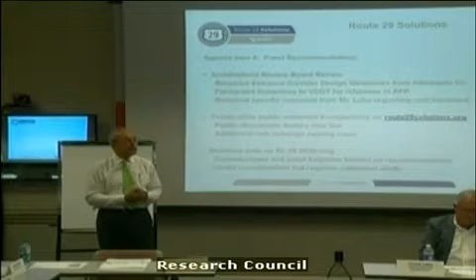Just an update on some recommendations that have come from you that we've firmed up a bit. The Architectural Review Board review—as you'll recall, we talked about trying to build as much as we could into the RFP package, as opposed to just getting designs and then asking people what they think of them. Mark did send us the entrance corridor design guidelines, and those guidelines are being reviewed now for appropriate inclusion in the RFP that will go out. We did get, and thank you Chuck, a specific comment from Chuck about treatments to the retaining walls. Today is the day we hoped to get any additional specific comments on architectural or landscape treatments, so we can pass them along to VDOT and have them considered in the request for proposals. We could stop right here and talk about architectural treatments for a bit, if you'd like to do that.

Morgan: I flagged in our last meeting that this was an issue important to us, and we were going to have some input, and I appreciate the extension you all gave us. It's important enough to us that we decided to hire a landscape architect to look at some of these issues. I brought a couple of drawings today, and if y'all will humor me, I can walk through them for about 5 minutes or so.

Can I help you pass these out? Those should cover those folks on that side of the table. I've got them, Morgan. Here's 3 for these folks here. Some free work done for you, John. I apologize to the members of the public, we didn't bring enough.

While those are going around, I'll just start by saying our goal was really to identify some of the items we think should be focused on in the RFP as far as architectural treatments go. We spent a good amount of time at our last meeting, and I think we'll be spending a fair amount of time going forward thinking about the traffic effectiveness of this particular project. But as others have pointed out, I think it's important to realize and remember that this is going to be a very important visual gateway for our community, a gateway to an important commercial section of the Route 29 corridor. So it's something I think we want to be proud of when it's all said and done. Let's make sure it's attractive. I think it should convey a positive sense of our community.

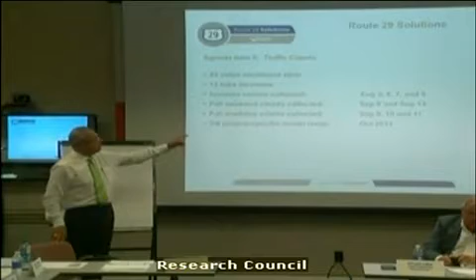There were a total of 33 video sites where video was used to capture traffic, and 12 tube locations. Back in August, before school started, on the 5th, 6th, 7th, and then the 9th, summer counts were collected. Last Saturday's weekend counts were collected. There'll be additional counts collected this Saturday, and today weekday counts are wrapping up at these locations, having started on the 9th. By the end of September, early October, a project-specific traffic model will be available and we'll be able to see the output from that model.

We had a conversation with Karen on some issues today, and that's the model we were talking about, Karen, that would actually let us see more detail as to how each project can be expected to perform in terms of traffic. Yes, sir, fall weekend counts are both UVA game days?

That would be accurate. The 6th and 13th are both UVA home football games. Just wanted to point that out. That's true, a little bit of a spike there, I would assume. Let's go back and talk with Teresa about that and see. Maybe one of the two days would be fair, but I don't think it would be a fair representation to have two of eight days represent the whole year. Get a maximum threshold. Yeah, that's easy enough. That's a good point, thank you.

Thank you. Thank you. Peggy Malone is doing that, right? Or Baker? Yeah, okay. Joel, will you take that back to Baker? Okay, thank you Pete, thank you.

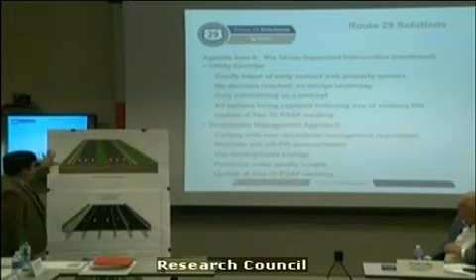So we got the typical sections we're going to look at today. I think last time we looked at the plan sections, the plan views, the top down, and today we're going to look at the lane configurations. It sounds like some of you have already looked at this on the website, so we'll go over these fairly quickly.

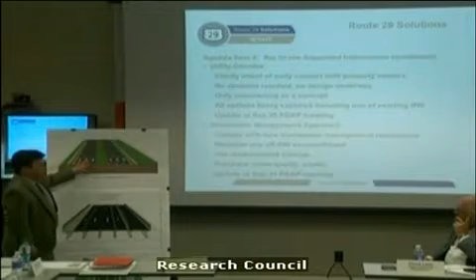This is 29 at Berkmar. 29 from South Fork Rivanna River up to Hollymead. It'll be 3 lanes north, 3 lanes south. Here we're showing 5-foot sidewalks on both sides with a 4-foot utility strip.

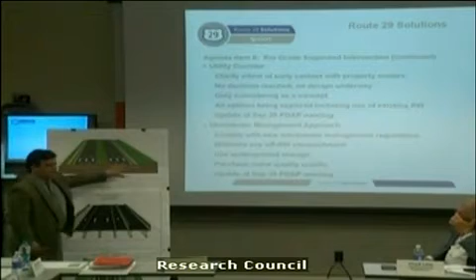As Philip mentioned earlier, we're going to relook at the sidewalk section because the county plan shows a shared use path on the east side of 29. So we're going to see if that fits within the footprint and the budget of this project and try to accommodate that. But for now, the plan is the sidewalks there.

You also notice there's curb and gutter. There's a raised median shown here, so we're converting it to an urban section.

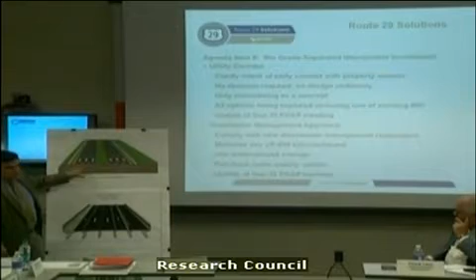Are there any questions about...excuse me, what is the width of the median? The width of the median? That'll be variable through there.

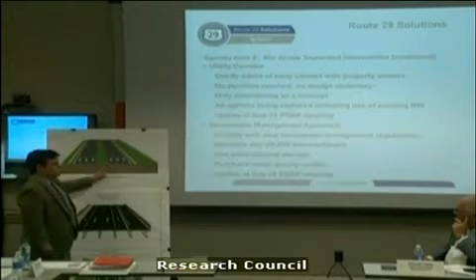Medians are generally 16-foot width minimum on an urban corridor. What that allows is a 4-foot strip when you have a left turn lane that comes in, a single left turn lane. But if you have a dual left turn lane, sometimes you have to get a wider median.

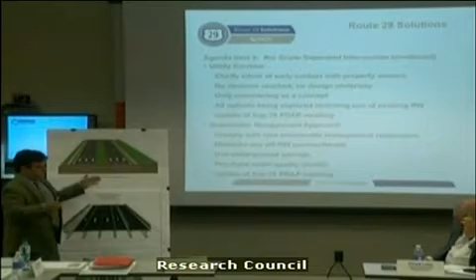In the areas that 29 already has a wider median, you'd probably see that width stay there. And where it's narrower, or where the grades are coming similar, you might see some changes there.

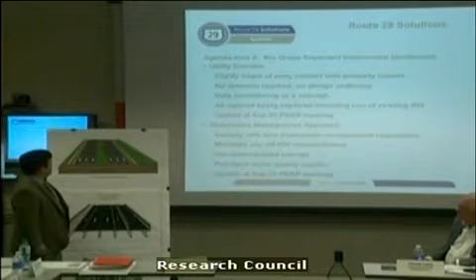Is there enough space for landscaping in that median? Yeah, we'd have to establish what the clear zone is and look at the landscape requirements, but like the 29 south section where there's street trees in there and everything, that's the kind of thing we'd be able to look at again, especially in the wider areas.

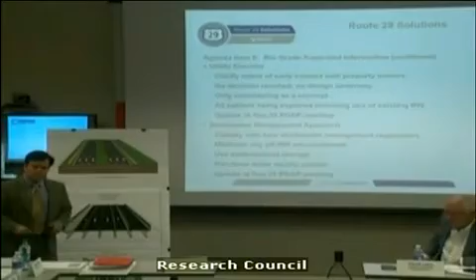Any other questions on 29? If you're talking about planting trees, the thing that allowed us to plant trees on the existing 29 was that all the utilities were favoring the east side of the median, over there. So in order to make it compatible with the utilities that were there and get the trees in place, the trees are not on the center line of the median. They're actually 2 feet offset. That gave us clearance for all the utilities.

So you may want to keep that in mind. RWSA will not allow planting trees on top of the water line. You say utility lines are on the far right side? I'd have to remember where the utility lines are. Under the sidewalk? No, the utilities were in the median, right there where you have your hand.

We checked with all the utilities how much clearance they needed and did a composite drawing of each one, then looked at what space was left for trees. We discovered that by not planting the trees on the center line, but just moving them 2 feet west of the center line, we were in compliance with all the utility requirements.

I'm not exactly sure what utilities are in the existing median on 29. I know that from Hollymead to the north, they recently moved the water line out from under the median and abandoned the old line. From the south, I still think in this area it does, there's gas and fiber optic. I think the fiber optic is over here now, up the side. Fiber's above ground through here on the top. Fiber optics is on the side.

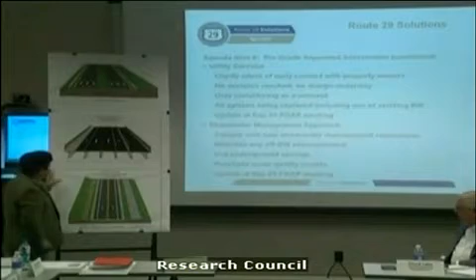Now we're going to move to Berkmar. This is the Berkmar Bridge section, and this is the Berkmar Road section, and they line up with what the features are. You have your two travel lanes, bike lanes on both sides, a sidewalk on this side, and a shared use path on the other side of the road. Same with the typical section.

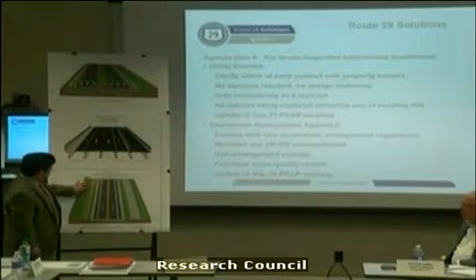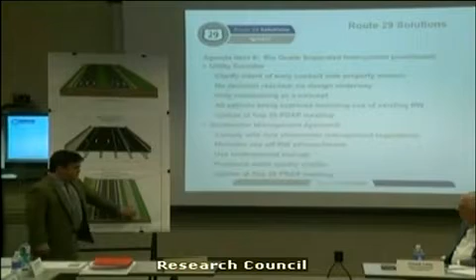This is looking north. You have your two travel lanes. These aren't marked with bicycle markers, but these are the bike lanes. You have curb and gutter again on both sides, your shared use path, and your sidewalk on the left. This would be for the entire stretch up.

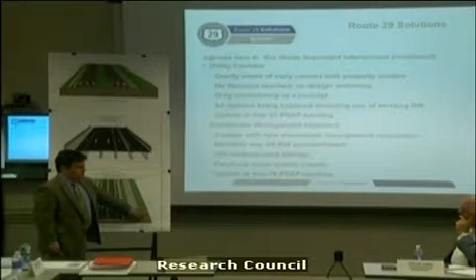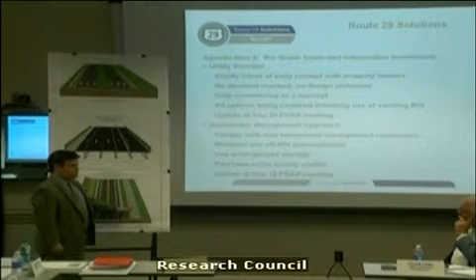Explain for those that don't know, what is a shared use path for? A shared use path is for bicycles and pedestrians. It's designed for two-way bicycle traffic. They have clear zones like a travel lane does for bicycles to make maneuvers. Typically a shared use path is used by a lower level bicyclist, someone not as experienced who would be out on the road bike lanes. It's good for kids on bicycles, but they're designed for 20-mile-an-hour bicycle traffic.

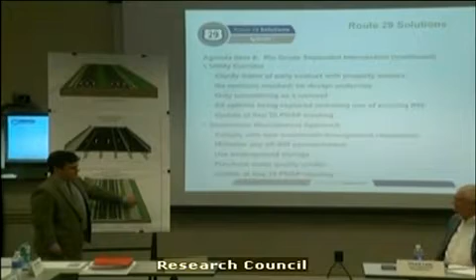Because you have bicycles in both directions and a sidewalk on them. Yes, you do. I think your experienced bicyclists will probably use these. Your kids and their parents could walk together and the kids could bicycle on here, or less experienced riders or teenagers that aren't ready to be on the road with the bikes.

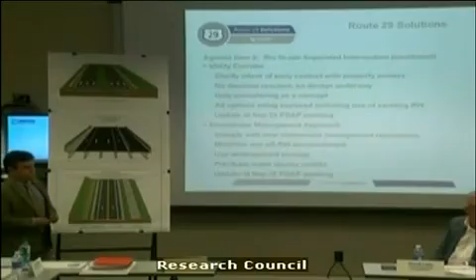It's been mentioned that although Berkmar extension is being built to a 2-lane width because the traffic forecasts don't see us needing 4 lanes for decades into the future, the right-of-way is being acquired so that if ultimately necessary, it could potentially be expanded to 4 lanes. How would that expansion occur?

Basically on the main line on the bottom picture, it would be a mirror image over here of this roadway. You'd have a divided roadway, 2 lanes in each direction. Depending on the space you have, you'd keep your bike lane on the outside here with 2-way traffic. So if this was your northbound lanes, 2-way traffic this way, bike lane going this way, this bike lane wouldn't be necessary. You'd basically start over here and have another curb and gutter section, 2 more lanes of traffic, another bike lane, and your sidewalk.

Is property being purchased there to allow for that? Yes. But it won't be graded to prepare for it? No, we won't grade that section. Grading now is kind of like building the second bridge - there's really no reason to grade it now. When you go down the road and build the other section, grading it now isn't a significant cost savings.

I was curious if a 4-lane Berkmar would eviscerate the shared use path, but it sounds like no. No, there'd be no reason to get rid of the shared use path. The intention is that it would be on this side over here.

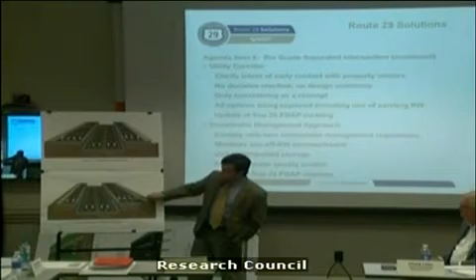Looking north, you're standing south of the intersection looking north. Between here and here is where the bridge would be, where Rio Road would come over. On the local approach, you have 2 through lanes with the rightmost shared through lane, and 2 left turn lanes. The left turn lanes will go up to the bridge and go west on Rio. The through lanes drop down, and this distance goes from 0 up to a clearance of about 16.5 or 18.5 feet.

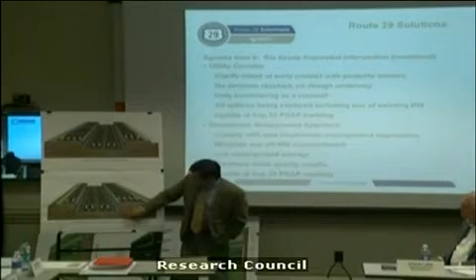We have sidewalks on both sides. One comment we had last time was whether there would be shoulders as you go under the grade separations. We're showing an 8-foot shoulder here, and a 2-foot shoulder on the inside. The 2-foot shoulder doesn't give you anywhere to pull over, but it does give clearance where you have to have a wall going down to separate that traffic again. We don't have enough width for a raised median, so it has to be a Jersey barrier, which is what we're showing here now.

You also have barriers on either side of this wall to protect it, and we have them up here as well. Obviously those treatments are generic looks at what they could be - they can be various kinds of things. It's the same typical section up here.

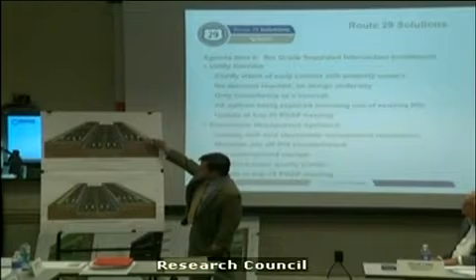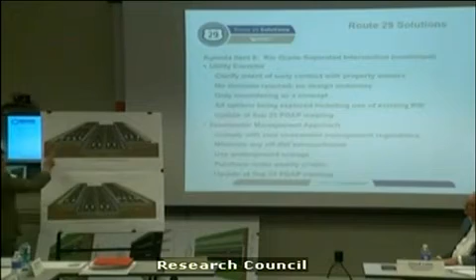As you come off of Rio and take a right to go north, this will be a right turn lane, with 2 through lanes going north. You'll have 2 northbound and 2 southbound through lanes, and then approaching Rio Road going south on 29, similar to going north, you'll have 2 through lanes with the rightmost through lane also being a right turn lane, and 2 left turn lanes. So it's basically all the same traffic movements we have currently, except these lanes are dropping down to avoid going through 3 traffic lights - the one at Rio Road and the ones immediately north and south.

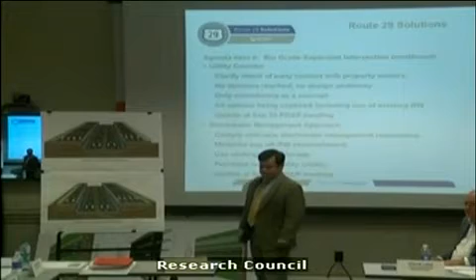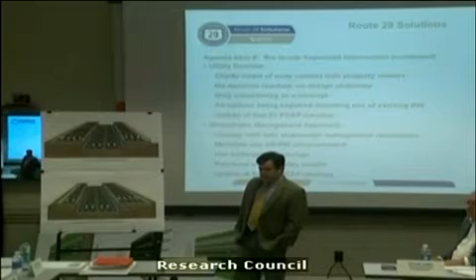Are there any questions on this? Yes, I have a few. The first question I have, that I was hoping I'd see specifics on today, is how do you build those 2 retaining walls and keep the lanes adjacent to the walls open to traffic?

These lanes up here? Just the adjacent lane. I think he's more focused on the left side - that first lane, and the same equivalent lane on the other side. Now, we're going to look at some plan views after this that show a snapshot of the sequence of construction, the maintenance of traffic during the period between May 23rd and September 2nd. So do you want to wait to talk about that until we get to that, or discuss it now?

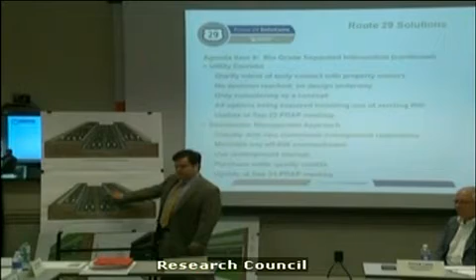Well, because you're most worried about the southbound 2 lanes here - those lanes have worried me before, I voiced my concerns and I still have them. First, how do you keep 2 lanes open to traffic? And then, obviously, the next question is, even with 2 lanes, do you know the traffic carrying capacity of those 2 lanes? In a perfect world, it's 1,700 passenger cars per hour per lane.

For what essentially is a frontage road, that's not the data. And obviously, with the entrances and the intersection, you reduce that capacity. But I don't have a calculation for what the capacity of those 2 lanes is. I've seen between the 2 lanes, it's somewhere between 1,200 and 1,500.

Where did you see that calculation? Oh, I have something that I downloaded from the internet, Colorado somewhere. But I'll be glad to share it.

Yeah, sure, you can do a level of service. And again, I'm not a traffic engineer, I'm doing traffic engineering basically 101. Traffic engineering here, you take the 2 lanes, and like I said, it's 1,700 passenger cars per hour per lane, and you start reducing it. That is the ultimate capacity of a lane of traffic. Then you start reducing it based on lane widths, shoulder widths, the amount of truck traffic, entrances, grades, and things like that, so you go down from there. I'm not aware that we've done that calculation on these 2 lanes.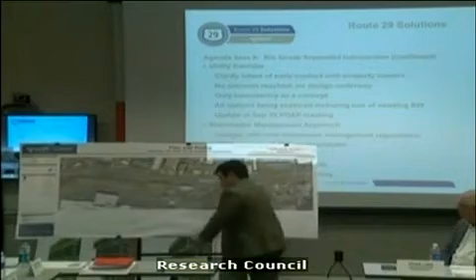So we have a little more detail on the Rio grade separation. Joel, why don't you scoot the whole easel up as much as you can. Is that okay? I'll start right away. What are these left turn arrows on the throughway? That's existing, this is a photograph. Okay, so I saw that, turn left in the middle of that bridge.

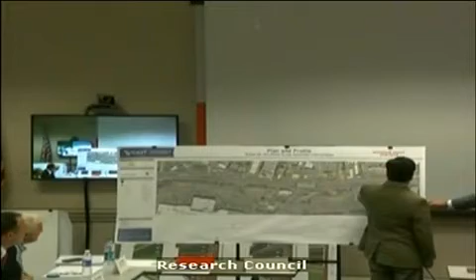We should have marked those out, because I did the same with the aerial imagery. Okay, and then the last thing, will these trees remain here, or is that just an image? From here on, yeah, there's no, they can remain. We're not, this plan is not showing - if you look at the light black lines through here, that's where the curb is being rebuilt. There wouldn't be anything on this one.

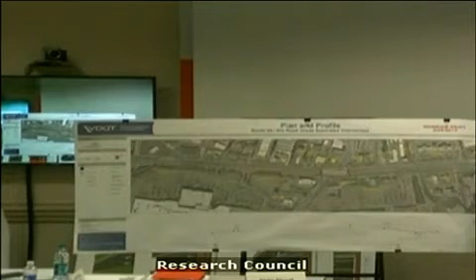That's what I clarified. Okay, so I've got to hang it a little bit so I can see it. Can you see? Oh yeah, I'm fine, thanks. This is similar to what we looked at two weeks ago, the grade separation. This has a little more detail today. Things to note, like you spoke of earlier, we have pedestrian movements on the south side of 29.

We also got a little bit of length off of that bridge there. What you saw last week was round numbers, 500 feet. This is about 320, 350 feet. So we've reduced that a little bit. It helps with lighting underneath there, and just the overall footprint is a little smaller.

I noticed that too, that it seemed different than what we saw last week. It is. My question is, does it still have the continuous U-turns, and does it still perform? Yes. The U-turns have been moved up a little bit. They were farther down here, and they moved them up into this area. You can see on the dotted lines the U-turns are still there in both directions.

And the intersection still performs? Yes, that's the 15th modeling we've done, number 15. We're able to reduce that just a little bit. It's kind of like finding your keys, you kind of stop after you find them. Okay, fair enough, I was wondering about that. Just a little reformed here.

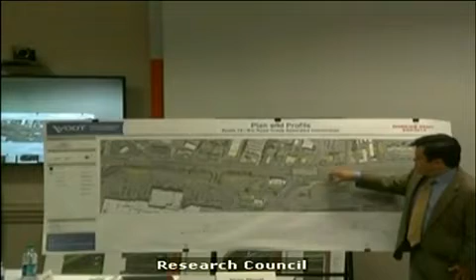One of your questions about the southbound, the two southbound lanes, is we are pushing this out a little bit. It's not going into the parking lot there. However, by pushing that out first, it allows us to maintain those two southbound lanes and also have room between where the wall is and the excavation in the middle here.

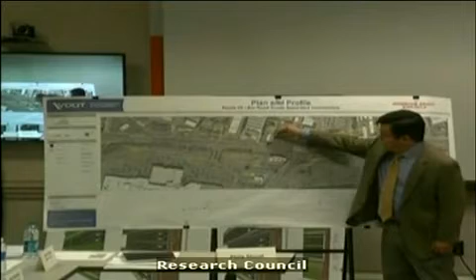To maintain this traffic. Well, my concern is on the southwest quadrant, where you only have two lanes for a long way, right down here. Yeah, all the way along that. And this right side is all going to be rebuilt.

Okay, well, that's where I had difficulty reading the drawing. So during construction, will those lanes kind of be more narrow than 11 feet to allow for it? During construction, I believe you'll see it down to 10-foot lanes at times.

Because I think that is a little bit of Henry's concern, and I do agree and understand what he's saying, and that is, how can you build a retaining wall right next to the flow of traffic? You've got to have a little bit of a buffer. Well, the retaining wall would probably be in place by the time we're actually excavating the material out.

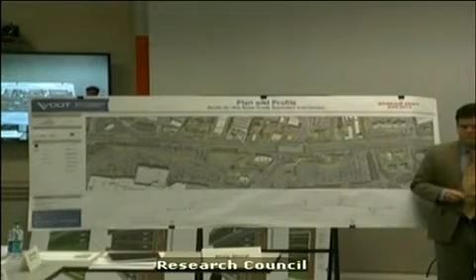Could you explain that? Dave said that last time, we didn't ask about it. Last time I thought I said that I wanted to see diagrams or something to explain it this time, and I haven't seen them.

Most likely, we'd see some night work occurring, and actually some sort of wall being put down in the ground before we actually excavate the material out. Sheet piling? Could be. More likely, the sheet piling is more of a temporary pile. What you'd want to do is actually put the permanent wall in place.

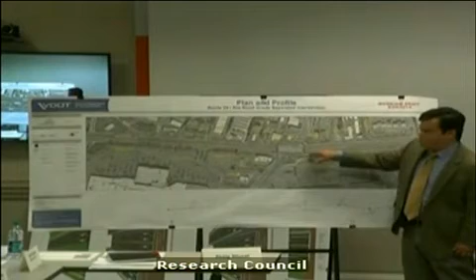This gets into the weeds of construction engineering, but again, I have no doubts. So at night, you're going to cut the lanes down, probably excavate, do footers, and then place your walls? It would be—what you could do along that wall line there, and this is just one possible solution, but we have to have a possible solution to put this out to get a better solution, which we're expecting better solutions to come in. One possible solution for these walls would be at nighttime to actually go along where this orange line is and drill a shaft.

It's interesting you say that about one of the possible solutions, because I was getting ready to ask Philip, is the selected contractor going to participate at all in these panel discussions? Absolutely. Because I would imagine they will come up with that solution—not necessarily. Absolutely, absolutely. Okay. But there is a way to do it.

But we have to get there. I mean, there's going to be work that doesn't affect any lane closures during peak commuting hours.

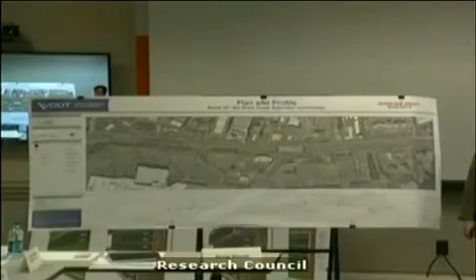Well, I don't want to try to design it, but I can see where you could do something. It would be nice if you told us what it is that you think you're going to do. I did try sheet metal. Well, I don't know what we're gonna do. It depends, the contractor will ultimately decide what to do.

We sit around at the office and we think of ways that we could do it. But you should have one way that you think is the best, and present it, and then say the contractor may have a better one. If you don't do that, it's kind of wishful thinking. We hope the contractor has a good idea. Our idea is half-baked, and we're not going to finish it. Our idea is great, but we're hoping for a great idea.

Lots of steel plates, move back and forth. Could be. There would be concern over steel plates during some weather events. Well, let's say- I'm putting words in your mouth, don't let me do that. No, steel plates would be a consideration. It would be nice if you told us.

The idea would be to do some night construction in the off-peak hours and get that wall put in place, and by 6 AM the next morning have those lanes all restored every day. Well, having the lanes restored by 6 AM every day is a requirement, except between May 23rd and September 2nd, 2016.

Do we know that night work has been approved by the county? We've been in discussions with the county about the night work, and there's been concern with the noise, and we would work with the county to address concerns like that, possibly restrict certain activities that would be noisy.

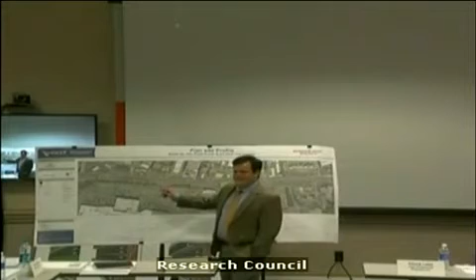Well, let's have the designer get that on there. There again, we don't need to guess. If we need to revise the drawings, we'll get them revised, because those are showing as fill on this drawing, and I think you're right, they are cuts. I have one last question.

Philip, I traded emails with you after last meeting about the stacking capacity at the left on Woodbrook. We have a continuous right turn off of Rio onto 29 North, and a lot of businesses count on that traffic accessing Woodbrook - Lowe's, Kroger, to name the big ones. Is there the opportunity to increase the stacking capacity at that location?

We're looking at that at Woodbrook, as well as we're going to look at it back south at the entrance to Fashion Square Mall. The answer is yes, there's opportunity. It already backs up into through traffic. It would be a shame to do all of this and then have that turn back up into the through lanes. No, Dave and I talked about that after the last meeting, and I've looked at it. It looks like we have this center stripe there to be able to do that.

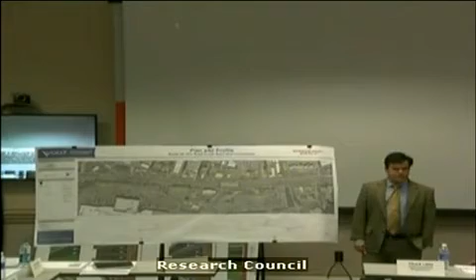Okay, any other questions? Move on. And Pete, we're looking at that as part of this, not separate. Okay, good. Thank you.

Okay, so this is basically a snapshot of what you might expect to see during construction between the dates of May 23rd and September 2nd.

You can see a slight red on either side here, and then the yellow highlight in the middle. The red areas are where we're maintaining traffic during construction. The number of arrows are the number of lanes you have there. The yellow area is where we're doing excavation and building a bridge.

Something I'd like to note about this plan that's not very easy to see here, but is important to the flow of traffic: down at the existing Berkmar Drive, we're going to put a cut in the median and have a signalized left turn lane going northbound on 29 at Berkmar Drive. Just during construction? Yes, and it's shown as being removed after construction. As I said last time, it should also allow emergency services to take a left going north on 29.

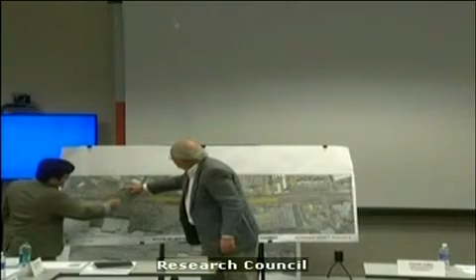If they're coming out of Berkmar... No, this is Berkmar, so you're saying coming this way? Yeah, even for the temporary span while building the bridge, they could utilize that intersection to get going north on 29 for response. They could go out on Berkmar, which is fine, but to get over to Rio and all, it'd be best if they could get access.

That's a good suggestion, and I guess that would take some sort of Opticom system on that signal, in addition to some sort of mountable curb to keep traffic taking the left and keep other people from making that movement, so the emergency vehicles could make it. So I think that's something we would look at. Wouldn't be a hard thing to put in there.

Let's come back on the 25th with where we are on that, okay? That's good. Ken, is this going to work out for us, or? I think so, got it this time.

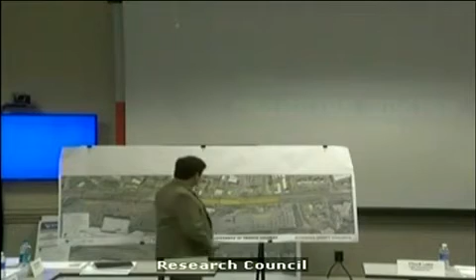So basically, as you go from south to north here, as you saw in the typical section, you've got your three northbound lanes. You have your right in, right out here. Continue the three northbound lanes. The rightmost northbound lane will also be a right turn onto Rio Road. Then on the other side of the intersection, you still have the northbound lanes as three lanes.

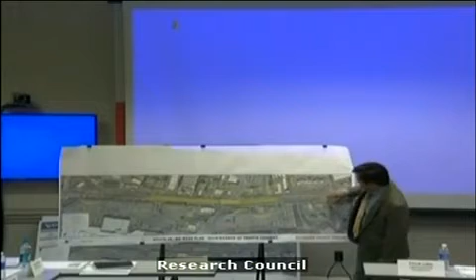In the opposite direction, you've built the new curb out here, and pushed out as far as you can without impacting the parking. You have your two southbound lanes go through. The rightmost southbound lane is also going to turn right onto Rio Road and go through, so you've got two lanes through the intersection. They continue south and come back in down there, just past the entrance.

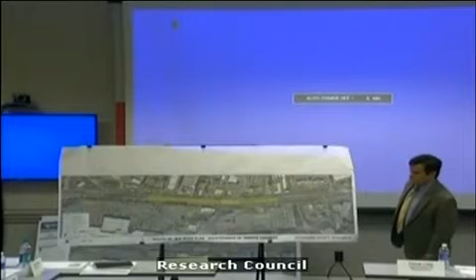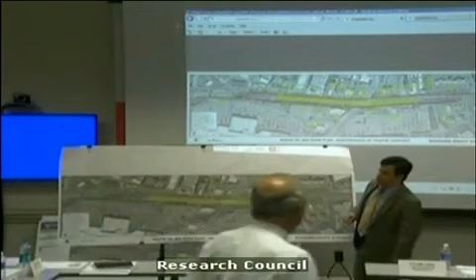Do you know how far back on either side they'll start the cones, the merging of traffic, that kind of thing? So the colored area—I don't know off the top. That's going to come out of the MUTCD, it's going to be traffic control. Well first, there's been some discussion on what the design speed through this would be, and whether the construction zone would be 35 miles an hour. In that case it would probably be about...

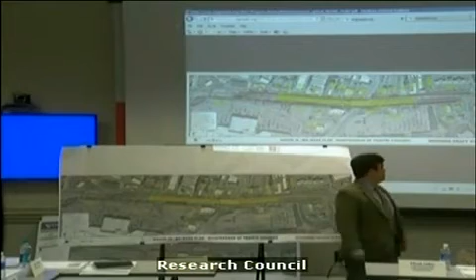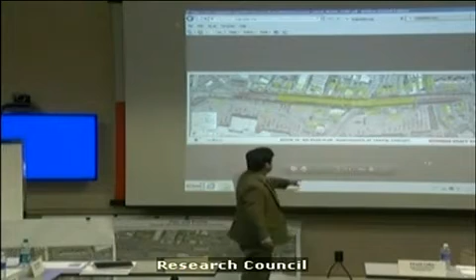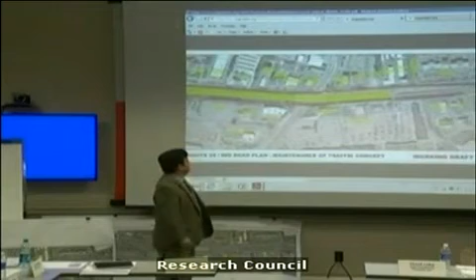All right, Joel, is that better to look at? We can zoom it when you're ready. Can you zoom it up, sort of, Joel? Can you be adjusted there while Joel— You can go online, you can go online. On the PDF, we are right. Yeah, okay, that's a JPEG I think. Go down, put the mouse down here. That's PDF, the other one's a JPEG. There it is, yeah, that's it. Yeah, the plus there, there you go. All right, keep going, just tell Ken where you want to go. Just blow it up some more.

You probably don't have an answer now, but just to kind of set the expectation—obviously there's always a construction zone, but then kind of the zone of merging and so forth, to allow.

It's going to be about 1,500 to 2,000 feet. That again is something we won't have to guess at. Chuck is going to look at the MUTCD, he's writing that down right now. We'll give you a general idea of what that manual requires, what VDOT requires for traffic control.

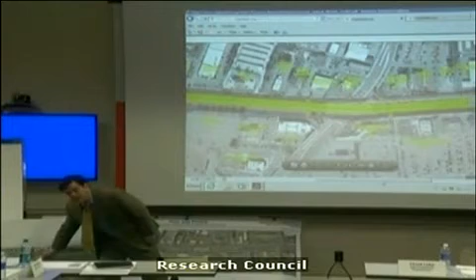It is possible that they did their highlighting based on it. I don't know. It looks like it might be about the right distance. They may have based it on 35 miles an hour.

Well, there is one thing I've seen in these drawings, and that is a temporary easement that goes back a good 20-some feet or whatever, and I wonder what the need and purpose for that temporary easement is.

There's a red line, you can see parallel to the red lanes. This one right here, well yeah, there's a little bit, and then on the other side it goes for a long stretch on the opposite side, right there. Goes on, and just skirts the Jiffy Lube building, skirts the canopy of the Hess gas station, affects parking in front of Hardee's and the store next to it. And in some places it's fine, there's just greenery. But I wonder what it's there for in the first place.

Well, it's a temporary construction easement because the contractor is going to need some area on either side of the roadway to complete the construction of the sidewalk and some of those turnouts.

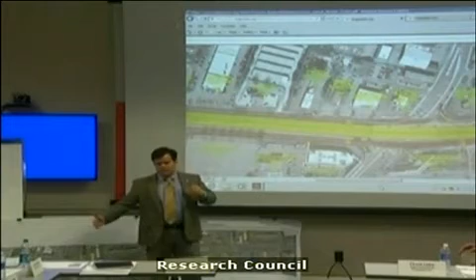Is that right, Hal? Do you know what these lines or the distance-wise were based off of? This distance-wise, I don't know offhand what that distance is, but it looks to me like, I can't see it as well on here, but the yellow line is right behind, not too far behind here, so we're not having a lot of impacts behind. It varies, yeah. So we're gonna have to look into that and find what these lines are based off.

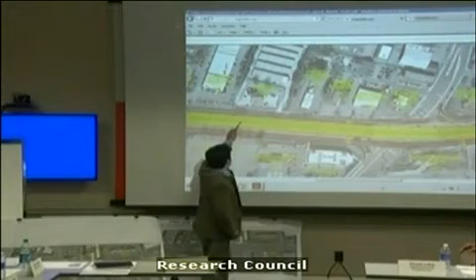Yeah, especially the ones on the southwest quadrant, they go on for a long distance, and they are pretty... I'm not so sure that they didn't put those on there so we can build these entrances that go beyond the right-of-way, so we have access to do that, but we'll have to find out. A lot more than, because again, if you go by the cut and fill lines, it doesn't look like you need that much, and that's why my question is, what is it doing in the first place?

There you see, it goes right smack against the Jiffy Lube building, and then it ends. And obviously, when you come to the new connection to the entrance to the tire store next to Jiffy Lube, the cut and fill line extends beyond for obvious reasons, because the apron has changed. So, as I say, I really like to know what they're doing.

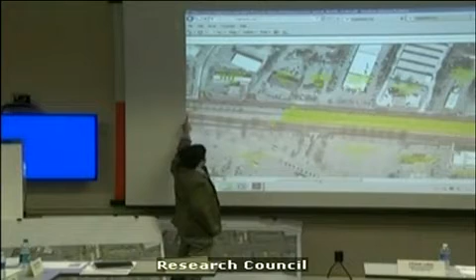Okay, so we'll look at what those temporary easements are, what the intention of those are. And you can see more clearly down here where the left turn is, to get over to the existing Berkmar there.

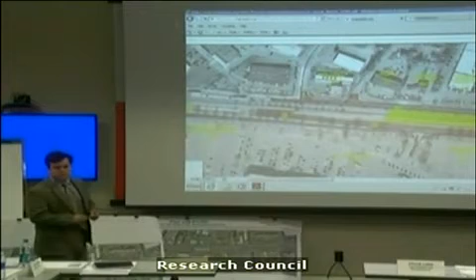And regardless of what a temporary easement ends up being, when the construction is completed, anything that was done in the area of the temporary construction easement is restored and replaced. Yeah, as I say, I'm curious what is it doing, because it's substantial.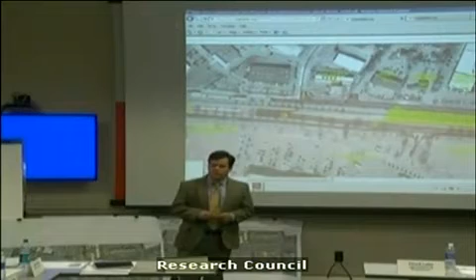And it's not everywhere, it's just certain sections. Like when you look on the west side, I see it for a stretch there, a few hundred feet, but then it stops. Well, VDOT, that might not be the right word, but if the contractor is going to be doing some work here at this entrance, the contractor has to be able to get to it to do the work. They'll be doing that on a temporary construction easement.

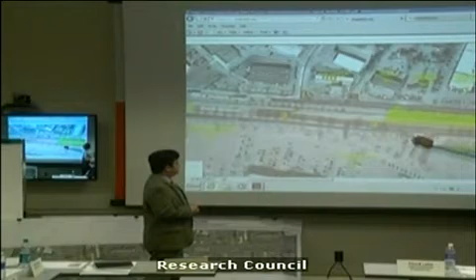There's been some talk and concern about whether a contractor is going to use some big area as a laydown area. That's between the contractor and the property owner, not VDOT. Now, there's a big field on Rio Road, but I already see that he's going to talk to the owner.

The temporary construction easement, and this may not be the result of a lot of study yet, just provides an area where the contractor can physically be to do work, which isn't unusual on a VDOT job. I know it's done, but I see it in some places and not others. Where it is, it's pretty generous, so I'm just curious.

Okay, one thing - if you can scroll to where the bridge is, to the right. Can you scroll there? Yes.

I asked a question last time about traffic maintenance, and I need to answer this one because Henry deserves to have me answer it. We talked about question 8 from the statement of qualifications, which said the contractor would be allowed to close Rio and detour traffic between May 23rd and September 2nd. I was really hoping the answer was no, that's not true, but after a careful look by VDOT's technical team and further discussions between the chief engineer and myself, the RFP will state, as the RFQ did, that the contractor could close Rio for through traffic and left turns.

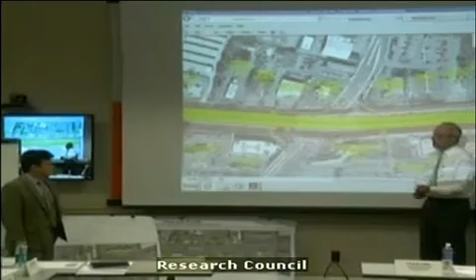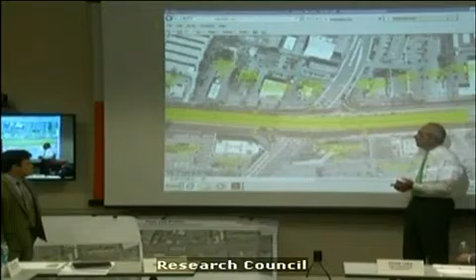But we're going to come back with that detour plan. We'll come back with more numbers, which may clear up some things for you and may not, but we'll let the numbers speak for themselves. It is going to be a requirement to maintain the 3 lanes north and 2 lanes south during this period in May. Outside of this window, there cannot be any lane closures, including during the peak period. And all nighttime work has to be finished and lanes reopened by 6 a.m.

Is it 9 to 6? 9 to 6, I don't remember the exact nighttime hours.

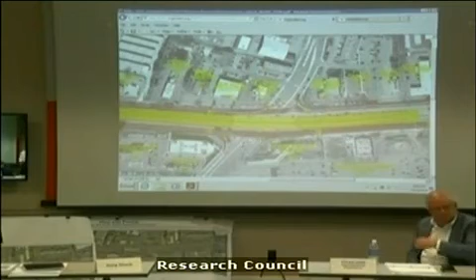Is there a process for the drive up one of the firehouse, the new firehouse, coming out of Berkmar and having the access off? Is there a process by which rescue, police, and all those departments have the opportunity to see this and comment on it? Yes, absolutely. We've been sharing it with the police department as well as the fire department. They're aware of it.

I haven't shared this yet because we just got it, but we're trying not to share too much until it's been discussed - they're pretty creative and may have some thoughts to weigh in. It was literally just yesterday that we checked the box with the chief engineer on this. Early on, that's what spurred the comment about the ability to come out of Berkmar. The fire department actually brought that to my attention, that they needed that.

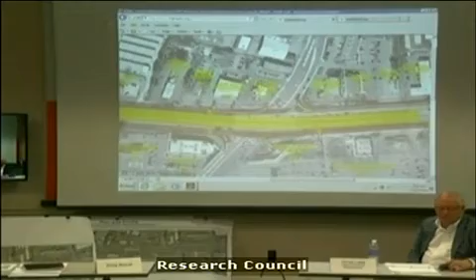This is where I should share an option with you that we did look at, that would minimize disruption through the total intersection and not require the closure of all through traffic and left turns.

That would be, rather than take 29 under Rio, to take 29 over Rio. But that has pluses and minuses. My sense has been that that is not something that would be desirable, but I want to ask you that. So in other words, of the through lanes being an underpass, they would go over Rio instead.

I don't believe that's... You're asking us a question? I'm asking. Let me find that drawing with the two scales. Again, it's feasible.

Let's talk about the profile. In one of my previous lives, when I also was looking at Route 29 — no, that's an old one. It's the one you have out there, yeah.

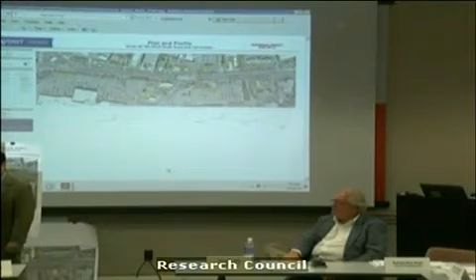Was it about 7%? Or 6%? Chasing the grade is when, for a short enough distance going up, you would not have a whole lot of impact to the capacity of the road. Chasing the grade is when you get on 64 and go up a very long ways — trucks can make it up a short grade, but continuous grades are what really slow the traffic down. There's not a whole lot of continuous grade here at 6% that would cause you issue with grades.

So you don't think you'd have to extend the whole length of the project because of this? No, I think those calculations are based on the same limits of the impact on 29. Okay.

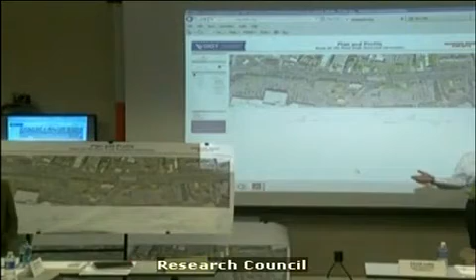The initial thought among us when it was first mentioned was, well, we're not going to do that. Then it looked like it's not what we thought it was, but we put it on — I won't even say a back burner, not even on any burner — because we didn't believe it was anything the community would be particularly interested in. The conversation came back up after we looked at the Rio situation and felt it was important enough to bring back up to you to see if you were interested, because if you were, we still have time to look at it and develop it and include it in the RFP. But if you're not, there's no reason to ask VDOT to spend time on it.

A whole bunch of pros and cons I'd have to sort out in my own mind. The job becomes a borrow project, right? We'll have to haul in some. Well, it would be similar to McIntire and 250, where they've been able to maintain traffic all the time because you're building the bridge.

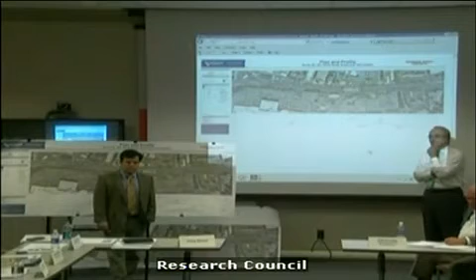At the embankment, I still suspect it will have to be a lot longer than the cut here to make it. In that case, the center lanes through here would be raising up. Right, you'd have to put some sort of vertical wall. Correct, going up instead of going down. But you may have to go a longer distance to get up there.

I think the answer is we don't. I don't think you do. You seem to say no, and I wonder. Especially on the north side, because the grade changes pretty quickly — it goes up. On the south side, now I'm looking at this screen on the wall — on the south side, the grade keeps going down, so in order to meet that...

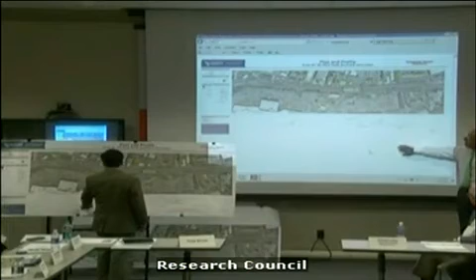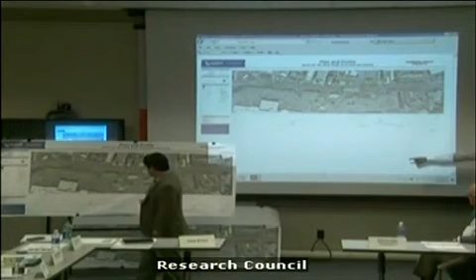Blow this up a little bit, Ken. There's no way to enlarge that? Oh, you can't enlarge that. The topography is completely opposite of what you'd find — in order to meet it, you have to keep going, and your grade is going down. You're trying to meet it while going down, your grade on this side is actually less than this side. So this is 3.5 now. I don't have a number on this. I have 1.5 right here.

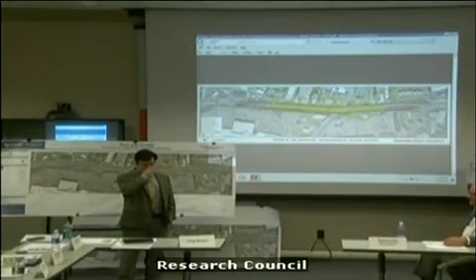I would like to think the experts in engineering and VDOT have already discussed this, and we're not engineers, so I don't know what our input would mean. Your input is quite frankly about aesthetics. It'd be a hideous bridge, I don't care how much you dress it up with bricks and lights. It's not an engineering question, it's really for you. It's not going to happen, so why would we even talk about it?

The pro is that you can maintain traffic in the intersection. The con for the final product is that those businesses that are kept outside of the trench, the ones that are there, not only do they have all the other problems of reduced volume of traffic, but they also have now an ugly wall to look at.

Nobody's here pushing it at all. It was fair to bring it up because of the issue with Rio. And what I particularly didn't want to do is make a presumption that you would think it was hideous. I don't want to make that presumption.

In an urban setting, as you know, some of us are not all totally enthused about this project. I understand that. But in an urban setting, the alternative of having raised embankments and retention walls above the current grade is probably more hideous than this. At least with this, you can look across. I don't disagree, but I can presume there's not 12 people here enthusiastically waiting to see a bridge plan.